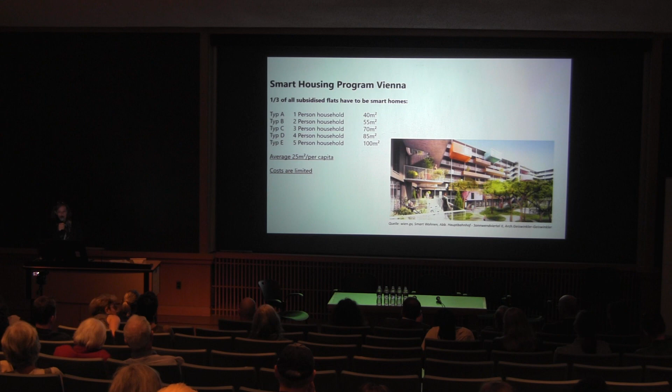So what the city of Vienna did to address this challenge is present the smart housing program, which means that one-third of all subsidized flats have to be what they call smart homes or smart flats, with a limited square meter per type. This lowers the average to 25 square meters per capita if they are fully booked, and even costs are limited. So this is also a concept of very affordable housing within the system of subsidized housing.

Another challenge we face is that the household structure is changing dramatically. The family household is not fitting the majority of people anymore; it doubled from 1951 to 2009, from 18 to 36 percent single-person households. So we not only need a lot more smaller apartments, but we also have to think of how people can...

...connect within these single apartments. How can we introduce new forms of typologies that would encourage neighborly help, like cluster living or co-housing projects, that will prevent loneliness and other problems that occur with this singularization.

And in the end, I brought another number: up to 2024, the share of people 75 years plus will rise by 37%, so 46,000 persons more in Vienna by the year 2024. This also means these people might need care, and diseases like dementia are growing very fast.

So actually this is also a problem of housing, because normally the care system was based very much on the idea of the family, of the wife who works at home and does this care work. This changed dramatically in our society. So with new housing, we have to think of other caring systems and integrate them into our housing projects.

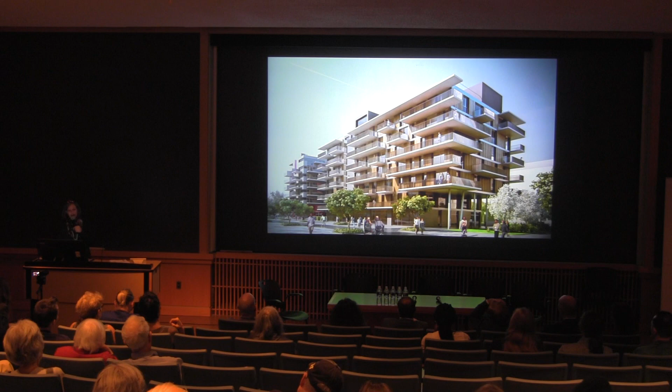And actually, within these 6 weeks, we had time to develop the main layout of the house with these 15 people and the whole team. It was actually the first time that a private group cooperating with a developer could win such a competition.

So we not only had a big party, but it was also clear that these 15 people, the association founded to buy the house from the developer, had to grow. They had to find their future neighbors, starting first with info meetings. After approximately 2 months, we had a group of 50 adults with whom we went into a participatory planning process.

This process consists of 3 levels. There is individual participation regarding your flat - the layout, the size of your flat. So each apartment is different and looks different and fits your personal needs.

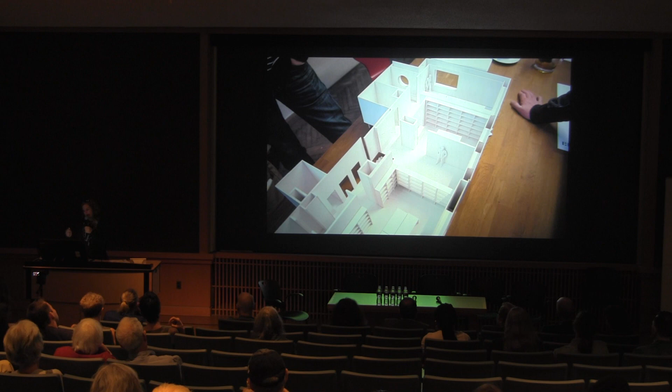Then there is a working group for architecture that takes all the decisions for the general areas and the community spaces of the project. And then for some really important questions, we work with the whole group in workshops - for instance, for the programming of the community spaces or the distribution of the flats, who will live where in the house.

So actually this is a very intense process, designing a house with 50 people, and many visitors who we guide through the house nowadays say, how can this work with never-ending discussions and arguing all the time? Of course we also learned from other projects organized by basis democracy, and we searched for a system that would allow quicker decision-making and a less complex process.

So we found this form of sociocracy that we introduced as a system to work on this project, and it's based on working groups. For instance, only one group of 10 people took all the decisions with us in architecture, and then there were other groups for sustainability, solidarity, finance, and so on. So these 50 people were working simultaneously on the project in different fields.

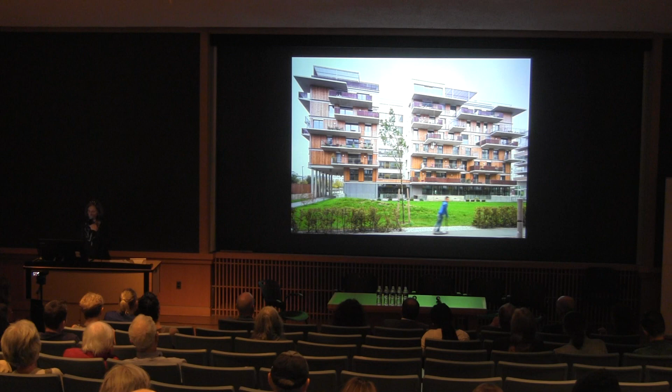So this brings me to the architecture and facts. Actually, it was finished in 2013. It is a 7-story concrete building with a wooden facade. It houses approximately 100 people - 67 adults and 33 children of different ages, professions, and levels of income. So a very diverse group. They live in 39 apartments organized along a central hallway.

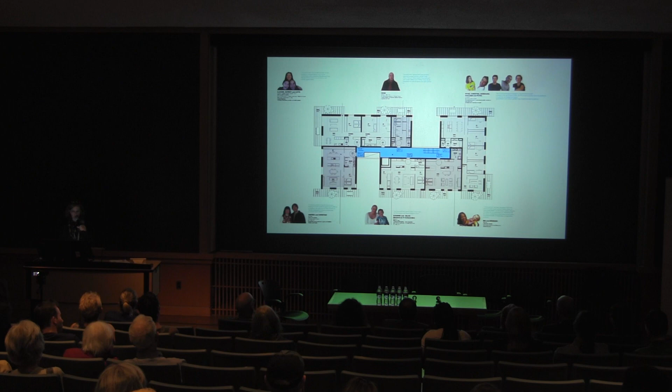Each apartment is different, as I already showed you. We have really small flats, we have shared flats for students. And this was possible because we didn't design an object or a fixed design in the competition, but we tried to design a system that was open to adaptability for this inner layout of the house.

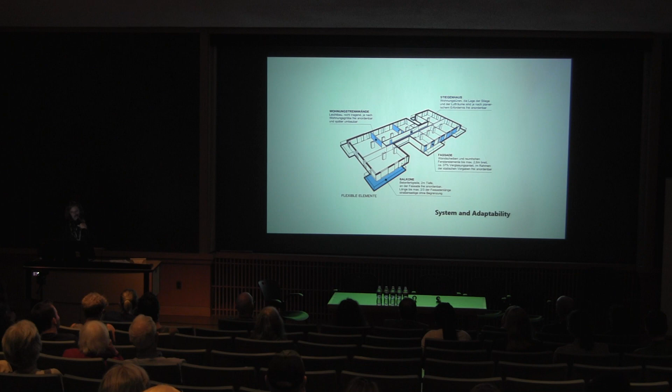It is not only housing, it also houses 350 square meters of office and commerce. Many people that live there also work there, like my office partner Markus, he also has his flat there. And then there's this grocery store and cafe run by 8 persons of the house, so it's also self-organized.

And we have a really large amount of community spaces. That was also possible because, due to special reasons, we did not have to build so many parking lots, and we had space for community spaces in the basement that we enlightened with courtyards. There we have a big event space, a workshop, a community kitchen, and a children's playroom that is transparent to the kitchen, but you can close the door and you don't hear the children.

And the best place of the house, which is also very important, is also dedicated to the community. So the whole rooftop is a community space, and for instance there they were designing a sauna and a library. We also have guest apartments and a rooftop garden.

But the project even goes far beyond architecture. As sustainability was something they wanted to reach, they also were thinking about mobility. They have a really big bicycle storage in the ground floor, a workshop for bicycles. They introduced car sharing, a private car sharing with 6 cars in the project. And they also have vegetable gardens that they share, for instance, with the neighborhood.

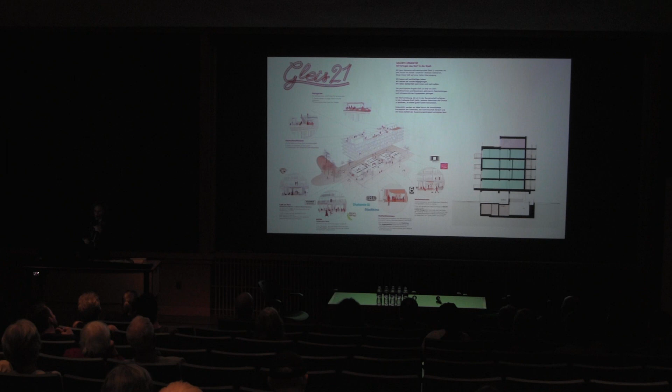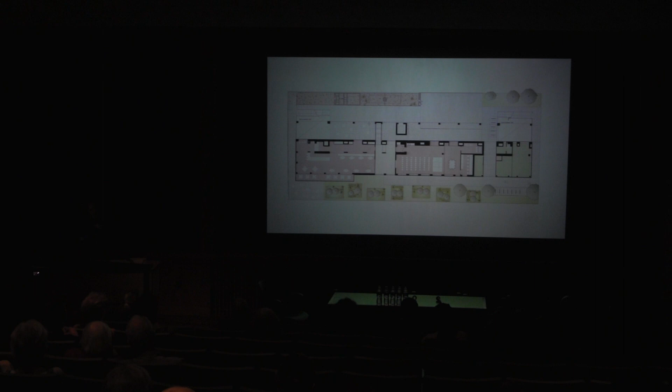So private people, groups of private people, could apply for these plots to realize their co-housing project on these sites. So again, we made a project team with future users. They already built an association for the competition, and we made a concept. The city was not only asking for an architectural and social concept in that case, but also for a concept for the ground floor to enliven the area, so public uses on the ground floor. So the group already made cooperations with cultural organizations, because they wanted to realize a cultural zone with a restaurant and a culture event space that they would organize by themselves. So this is the team, the association.

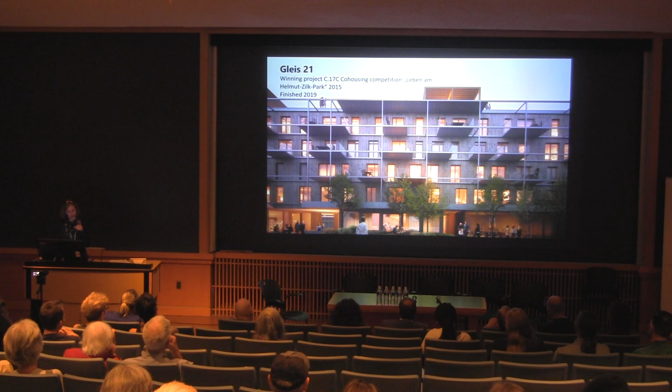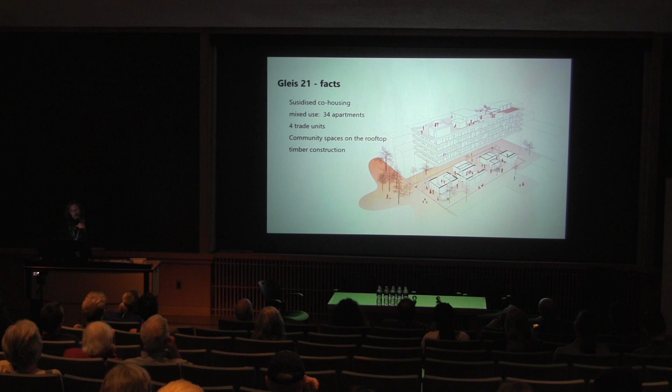It's mixed use, 34 apartments, and it has its community spaces on the rooftop because the ground floor is public use. What is also special is that it is a timber construction.

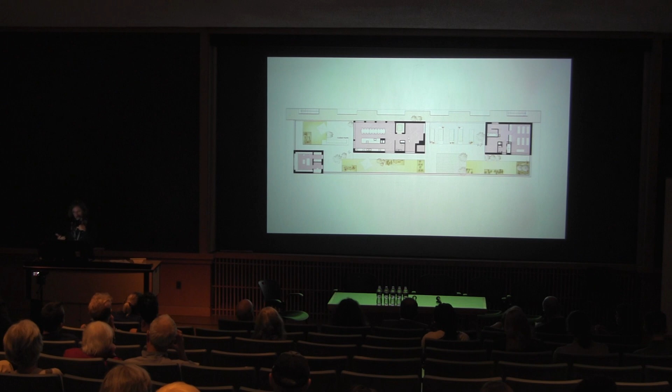It has these balcony access points, so every apartment has 2 sides: this access balcony, and more private balconies on the other side. The rooftop again is for the community, so it's a really nice rooftop garden with a kitchen, a sauna, a guest apartment, and a nice program.

As I said, I don't have photos yet, but this is a photo from the construction, from the party. There's always a big party in these projects when we reach a certain point in construction. And these are some photos just before we finished.

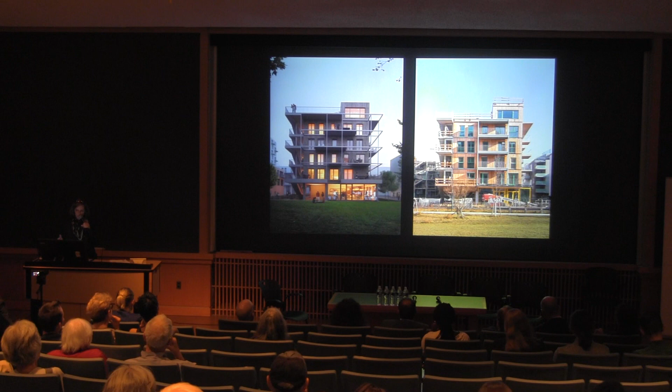What is important is that this cultural zone will start its program in October, so they also made a crowdfunding for that. It will really be a lively part of this new urban development in the city.

There are 2 more projects I want to show you very briefly, because I also want to point out that we do not only do co-housing and these very participatory planning processes, but we try to learn from these projects and also implement some elements of that in other projects.

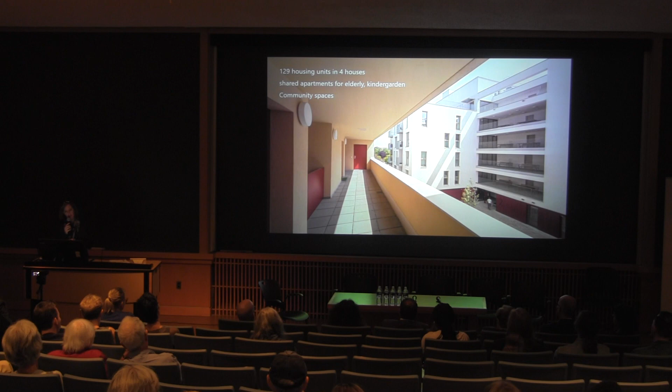One of them, for instance, is this subsidized housing project. It's also a winning project of a developer competition with Trans City Architects. We made a cooperation, 2 architects, 2 developers. It houses 129 units in 4 houses. It has also shared apartments and a kindergarten and community spaces, of course.

What is special about it is that the special theme here was intergenerational living. What is special is that we not only introduced very many types of apartments in the project, but we also asked for intergenerational tandems to apply for this apartment. So if you would apply together, for instance, a young single mother with her father who would support her with the child, they were preferred to get the apartment.

The idea was that with these small social networks, they will be the basis for a wider social network within this new housing area, making it easier to take contact with the neighbors, and that they would establish a strong neighborhood that would support each other.

So the apartments are all smart. Sometimes we try to make all apartments smart in the sense of very compact apartments, so that they are affordable. It was also flexible because we didn't know who would apply for the apartments, how many apartments of which size we would need. It's also a very flexible ground floor system.

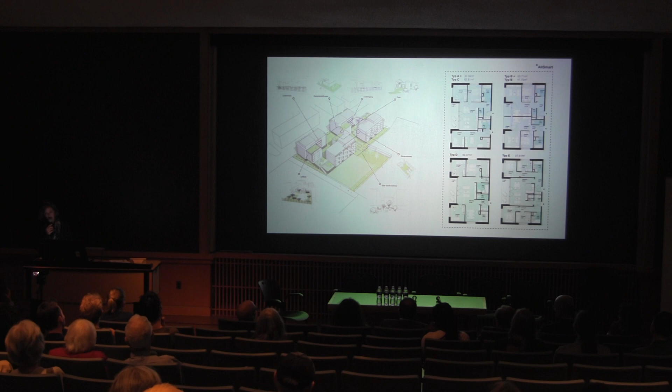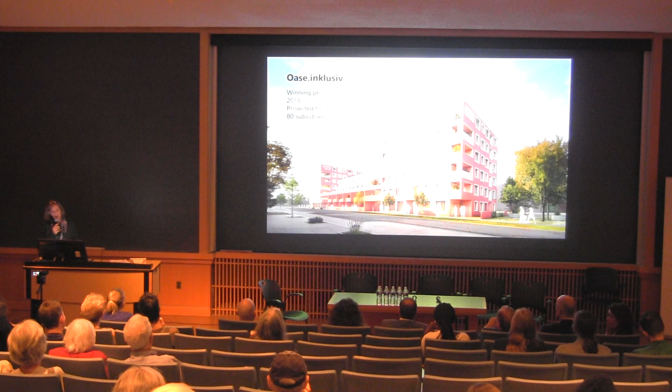So just some expressions from the entrance and the courtyard. And the last project, just a very short glance at that, is also interesting because actually it was a co-housing competition, and we could win it again.

It's 80 subsidized housing units, but in this case we said we want to make a very inclusive project, very affordable and very collaborative at the same time. Of course co-housing projects are not so open to some groups in society because you need to know the language. It's a very communicative project, and you need to have time, and not all people have so much time to invest in such a process.

So in this case we made a cooperation with a social service organization, the neunerhaus, and they are helping refugees and homeless people to integrate into the housing market. We set up a really low threshold participation process, so that would need less time and also would be easier accessible for the people.

But to still keep the advantages of participation, that people will get to know each other, that they will be able to set up the rules together, and when they move in, they're already a community.

So actually what connects all these projects, I think, is that they are not only seen as a design, a construct of a building or construction, but they are seen as processes that not only form a building, but also form a community. It's a social process where people can get to know each other and organize themselves.

see the housing in Vienna. I was in Berlin in June and saw the same configuration of housing, always around a large courtyard. And I was wondering why we are not doing it with developers. I'll show some of my work, and it's always around a courtyard, but it's not regular developers.

I think that the big problem here is income inequality. I came here in '75, I came to the US, and I remember that at the time there wasn't such a large gap between productivity and wages. When productivity went up, wages went up. And so people earn more money, they can afford housing, and as Ronit said, when they earn more, they pay more, and it's visible.

But now, in the last 40 years, productivity went up 80%, but wages are flat. So where is all the profit? The profit goes all to the shareholders.

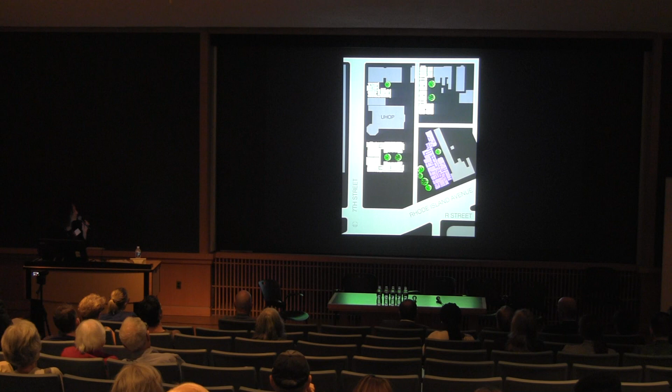That's inside. And that's the last one on this block - this is on Rhode Island Avenue. Same thing, we had to change the zoning map here because it was a lot for townhouses, there were 4 townhouses. So we did an apartment building, and that's the facade on Rhode Island Avenue.

All the apartments here have balconies. There is a court, and there is a roof that all the tenants share. Indoor. And that's the garden.

The next project is Baltimore, and I'm showing these slides because I wanted to show you some of the neighborhoods that we do the project in. This one was on Ashland Avenue, not too far from Johns Hopkins, but that was my neighbor. When we were at the site there, some of these buildings would fall every day. So that's our project.

It's 6 townhouses around courts. Very simple, but also security was a big issue. So you can see there is a wall, it's enclosed, and we didn't do small windows. We provide a lot of light and ventilation, and we have these very delicate white bars that give security but still allow light and air.

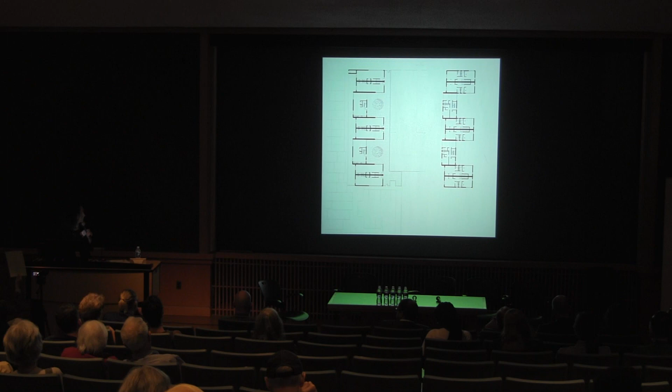So you see the units around the trees. This is just when the project was completed. And you see the walls that kind of surround the property for security. And inside, ample light and ventilation.

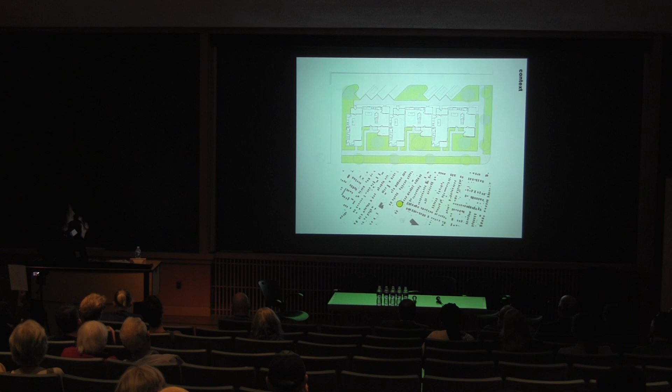This is one in Charlotte, North Carolina. And again, it's 6 townhouses - 1 vertically, 1 horizontally, and so on vertically, repetitive and also affordable. So these are the townhouses. And inside. I'm showing the plan just to show that it's very simple, and it's really important to have very simple plans and to think how they are going to construct it easily. That's the other one.

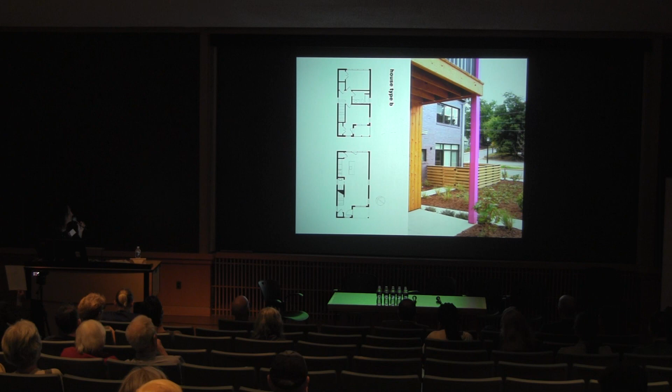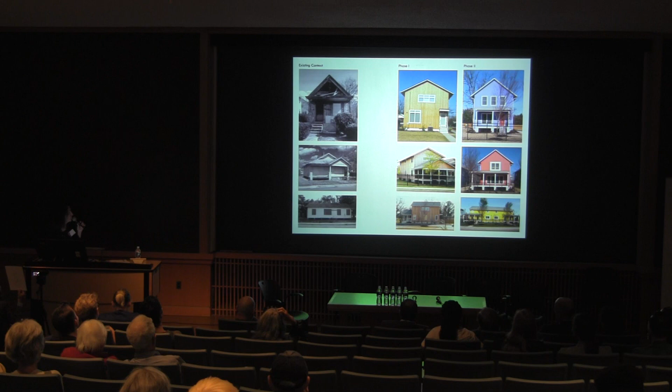It's important for us not just to have quality of life for the residents, but also to have architecture that belongs to the place. So that's the multifamily, and that's across the street, the single family homes. That's it.

We have the lone survivor still here, I appreciate it.

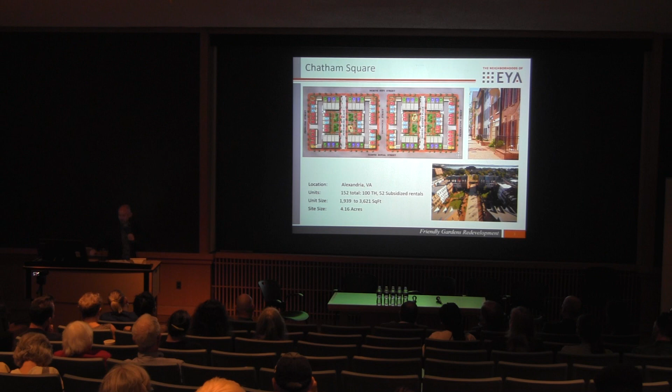So we had to go through strict historic architectural guidelines here. You can see the houses and the styles look like everything you see in Old Town. And the way we did it was we mixed the unit types. And so on the left, you're seeing a mix of market rate townhomes that sold for, at the time, $400,000 or $500,000. Now they would sell for north of $1 million. But $1 million townhomes directly next door to affordable housing units.

And these were not NPDU level 60%, 80% AMI. These were 30% and lower, largely voucher or people that were not working but were getting public assistance. But we mixed them in to where that townhome stick on the far left there has 4 affordable housing units within it, and it is directly next door to a market rate townhome that might sell for $700,000, $800,000. And so immediately, just by reconfiguring and redesigning and creating architecture that was attractive and of the neighborhood, you take people who had been living in poverty and put them in a location where they had pride. There is no poor door. Nobody knows that they're even walking into an affordable unit, and that's especially important for their children.

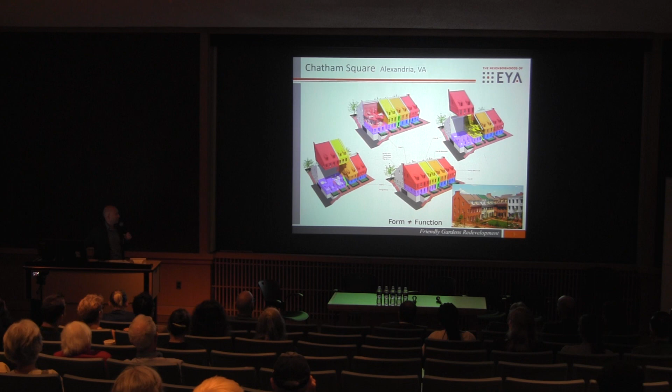And so you start seeing this mix of typology of units where you might have a full townhome unit on the backside of a 2/2 townhome unit where those are affordable, or a flat on the first floor. And so this is our first project that we did this, and it led to a number of other projects. Old Town Commons being our largest.

We did this in an affordable way with wood frame construction, and created an entire 8-acre neighborhood essentially that used to be a blighted part of the city where people, I would say people who didn't live there and people who lived there felt nervous about walking through it.

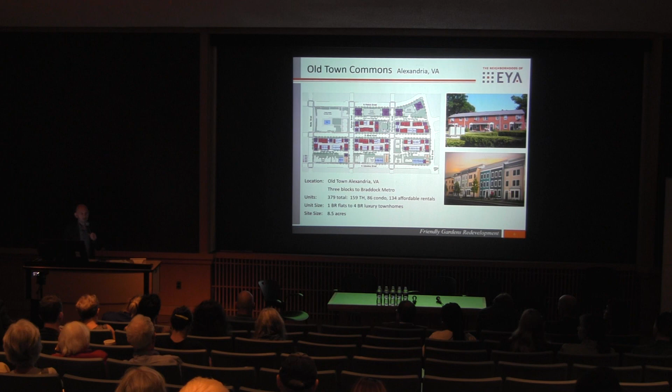And it's now the same number of affordable units. This project also was 30% AMI, with some 60% AMI units as well. But it's fully mixed and integrated into a market rate community where houses sell for $800,000 to $1.2 million. The middle 3 houses are market rate townhomes.

And we took the left 2, what looked like townhomes, and turned them into 3 3-bedroom flats, each about 1,100 square feet. So you're able to fit a family within each of those levels, and they look like individual townhomes. One unit's door walks right into the first floor, the other walks in and goes up a flight of stairs with 2 doors going to the upper level unit and the middle level unit.

So absolutely nobody would ever know from the outside that you're walking into an affordable unit. The only way, even out there today, that you can tell the difference is that the affordable units don't have a 4th floor loft and rooftop deck. That's how we can tell today when we go out there.

We created a park in the middle that has a playground. This is now a very mixed income community, so you see people of different races and different socioeconomic circumstances playing together on the playground. There's a community center that the city built on the property as well that's heavily used and heavily integrated.

Integration—it's hard to talk about urban development and not talk about the history of race in this region, so thinking about how these projects can also start integrating some of the neighborhoods in these areas.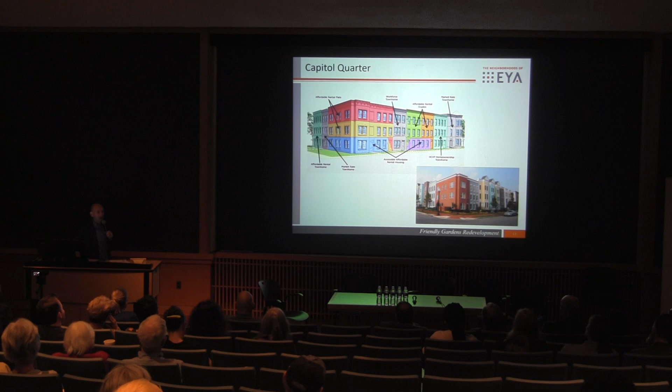We have duplexes as well, and we just mix them in. The nice thing is you can have density, and it doesn't have to feel overwhelming. It doesn't have to be high-rise. It doesn't have to be big buildings. It can have light and air as long as you're planning it in a good way.

Another project in Montgomery County, this is in partnership with the Housing Opportunities Commission, where they had an old 2-story kind of rambling affordable housing project near the Purple Line, on the Chevy Chase Lake Purple Line. So we partnered with them. We used the land and the value of that land in Chevy Chase, which is a wealthy neighborhood, to give them the equity needed to build a 200-unit mixed income high-rise building. We developed that in partnership with them.

So this went from 60 affordable units to 80. It gave them nice new units and replacement housing for what had been torn down. And then we built market rate townhomes mixed with affordable townhomes as well on the backside of that project. These are townhomes that sell for $1.4 million, $1.5 million, $1.6 million, right next door to affordable townhomes that sell for $250,000 to $300,000.

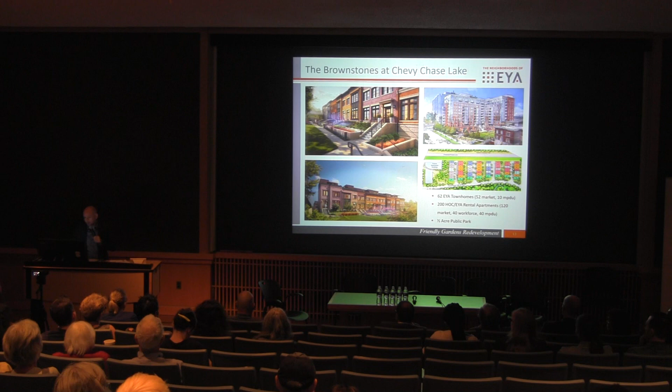And the great thing about our community in Montgomery County is that people actually, that's good. We want to be mixed income. Even those buying $1.5 million townhomes get the social contract that we need to be doing here.

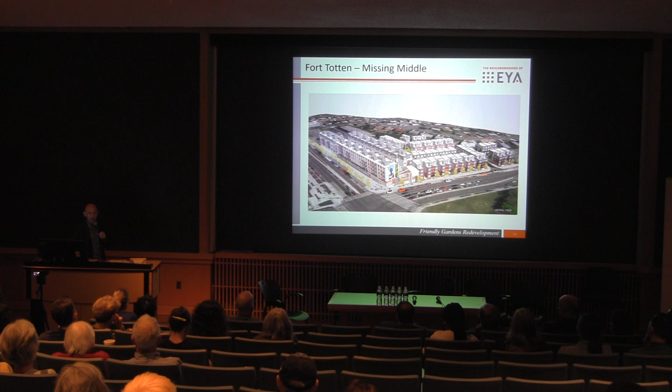That's an image of what the architecture looks like. In the interior, they're small, they're tight, but they're open. So what Suzanne had just mentioned, this idea of simple architecture and open spaces allows you to make them a little bit smaller. And these are back-to-back units.

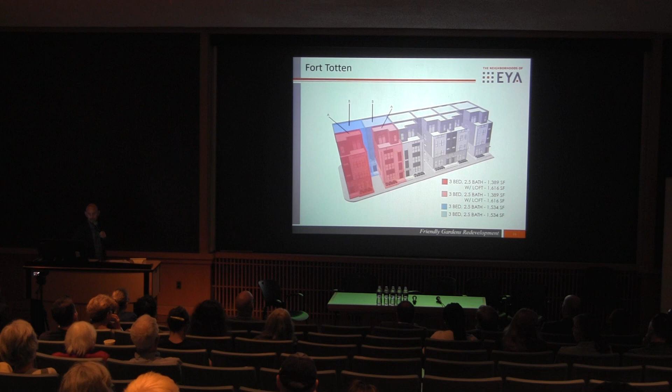And then the last project, really quickly, there's nothing to show on this quite yet, but I know the Purple Line Coalition folks are here. We're thinking about affordable housing on the Purple Line. We've been focused for years now, about 4 years, tying up a bunch of properties near the Lyttonsville Purple Line station between Silver Spring and Bethesda. We have some ideas here of communities that'll be in the 30 to 40% affordable range of the units, and has the opportunity to deliver about 400 affordable units to the market as we start working on this project.

So happy to follow up and talk to other folks that are involved in that, but the concept here is, once again, a mix of townhomes, a mix of apartments, some in partnership with HOC, some private projects of our own, some in partnership with a nonprofit, but mixing it into what is a great stable neighborhood already today, and creating better access to transit, some retail on the first floor.

So anyway, that's who we are, that's what we do, and a lot of this comes from being able to partner with great organizations and thinking about design in an interesting way, in a creative way. And then finally, as an organization, we tend to have people that we're developers, we have investors, and obviously we care about that. But second to that also is a lot of us come to work at EYA because we like to do well by doing good. There's a really sense within the organization that giving back is extremely important, whether it's through affordable housing or sustainability. So thank you very much for having me.